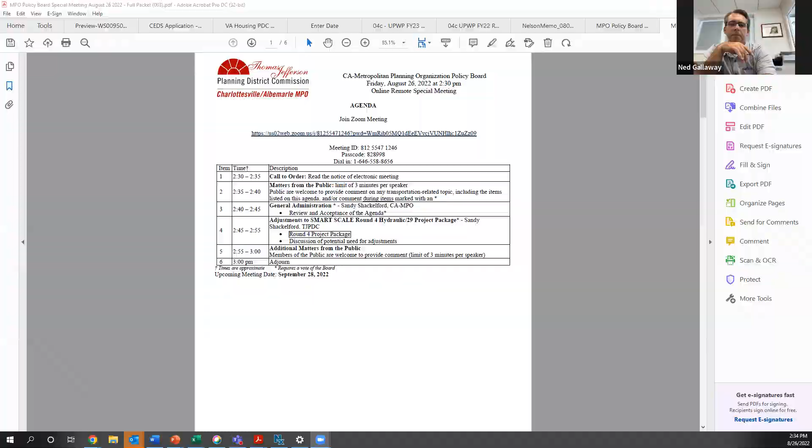So back to you, Mr. Chair. So we are here to, I don't have, my screen is limited. Do you have the agenda that you can put up? Yes. I mean, we're here for one item, I believe. We do. We would start with public comment. We do have a public comment period. Is there anyone here online that wishes to give public comment? I'm not seeing anybody raise a hand. Am I missing anybody? I'll just call again. Anyone here to give public comment? All right. No hands are raised. Yep, we'll close the public comment period.

And Sandy, are you introing the topic we're here for today? Yeah, I'm going to turn this over to Hal Jones, who is the project manager from VDOT. And he's going to give you some background about the Hydraulic 29 project package that was approved in round 4 for Smart Scale funding, and will describe basically what it is that VDOT is requesting at this time. Go ahead, Mr. Jones. Okay, good afternoon. Thank you, Sandy. Can everyone see my screen? I'm going to give a brief overview of the project. This is the location of the Hydraulic 29 project, on the north end of Charlottesville, as most, if not all of you are aware.

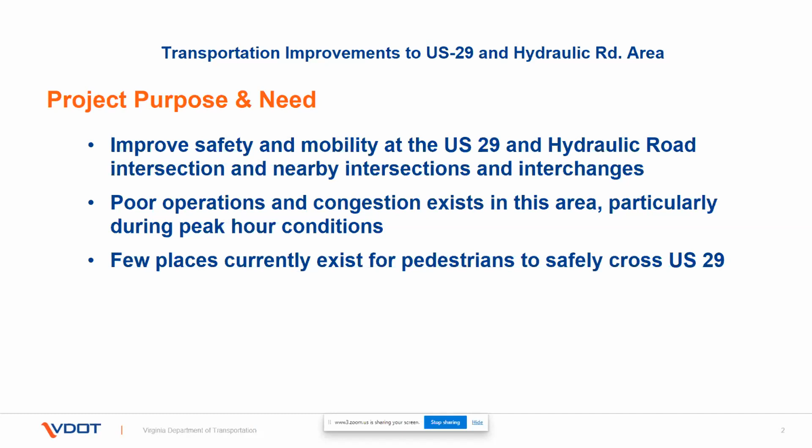The project purpose and need is to improve safety and mobility at the US 29 and Hydraulic Road intersection and nearby intersections. Currently, there are poor operations and congestion in the area, particularly during peak hour conditions. There are few places to currently cross US 29 safely in this area. So this is one of the reasons we're working on the project. The status of the project is, this is the last remnant of the 29 Solutions program. We currently are under procurement for a design-build contract on the project. Our estimate exceeds our budget, and next month at the September CTB meeting, we're planning to ask for additional funds.

Just a brief background, the Hydraulic Planning Advisory Panel, which was a group of about 12 individuals, city and county elected officials and business owners, met beginning March 2017 to start a planning study, which would be the basis for the transportation study for this project. The panel met twice a month for most months through July 19th of 2018. So there were 29 meetings over a period of about a year and a half, where the planning study was developed and reviewed and formed the basis for a group of transportation projects to address needs out to 2045 in the future.

This ended in an application for the 2018 Smart Scale round, which was very robust, and it included 3 grade-separated crossings of US 29. On the top of the screen is a Zan Road overpass. At Hydraulic and 29, we looked at a design where Hydraulic Road would go underneath 29, and down at Angus to the south, we looked at an overpass to carry traffic and pedestrians over 29 there. The application was scored, and it did not score well due to the cost estimate, and it was not funded.

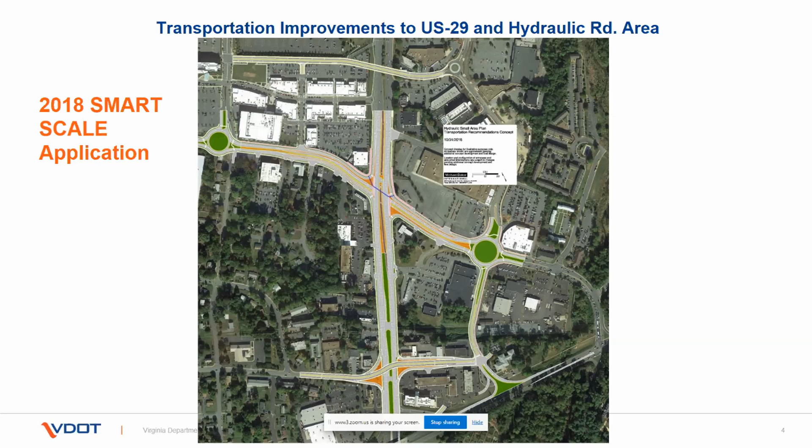So for the next round in 2020, much of the former panel met again in early 2020 to prepare an application for round 4 of Smart Scale. We started this with the basis of looking at available funds and trying to reduce scope to make some improvements and utilize the existing funds while needing very, very little additional money.

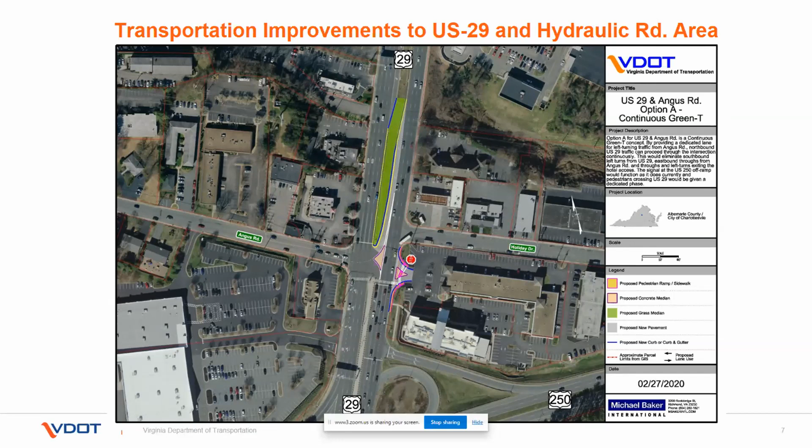Element B is the green T at Angus Road. Notice in particular the entrance and access for the hotels on the east side of 29 there. Through the last year of development, we made some changes to that that I'll show you. Element C is the pedestrian bridge with bus stops on either side. The bus stops are indicated in the green shading, rectangular areas.

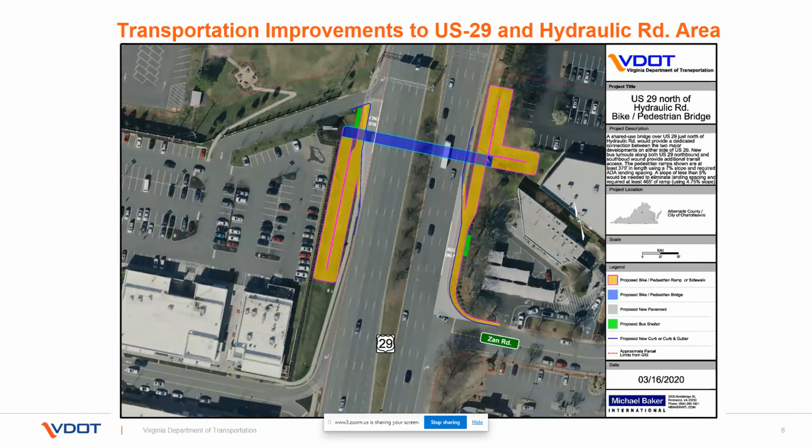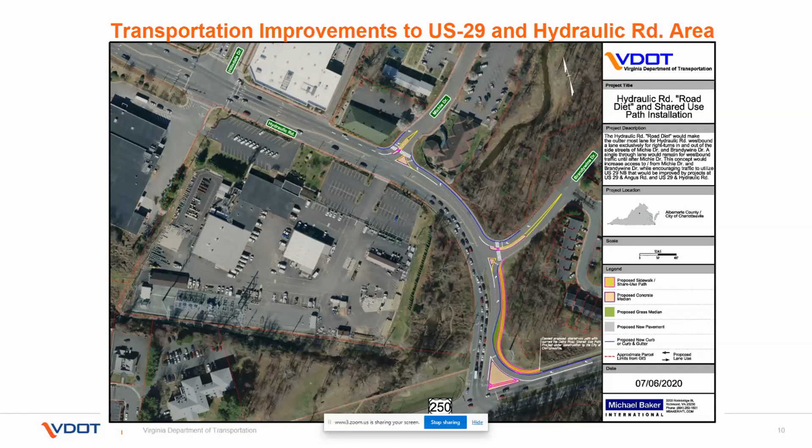Element D is the roundabout at Hillsdale and Hydraulic Road. And the last element E is the Hydraulic and Brandywine and Michie section. The orange designated shared use path is shown on the lower right, and we're installing medians to direct traffic for right out only movements from those streets. So here's the overview as it went to Smart Scale application in the summer of 2020.

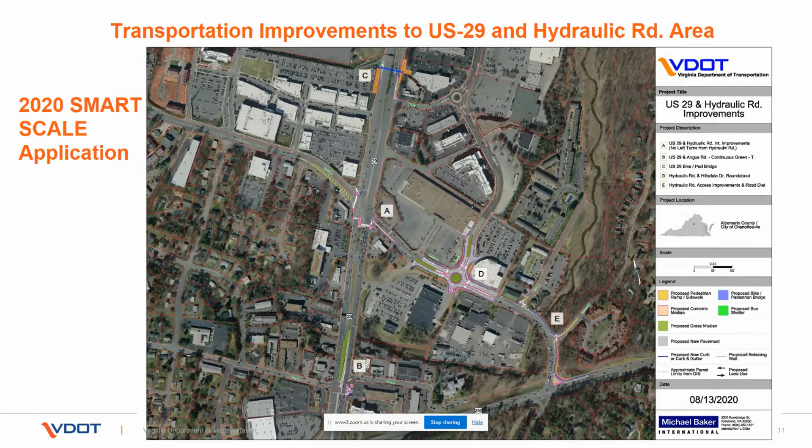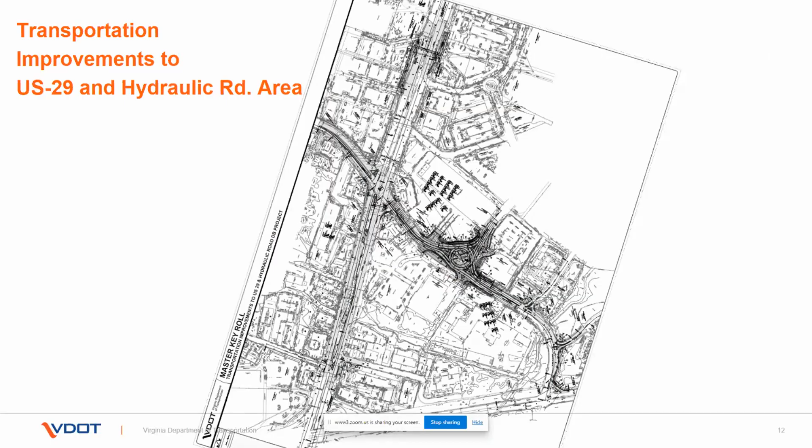After we got the project funded last July in 2021, we began additional studies, geotech studies, environmental studies, additional survey, and we got into more detailed preliminary design. And this is the current concept, as you see, which we took to public hearing this past May. I'll highlight each of these elements in a bit more detail, but we did have a public hearing in May where 63 attendees were present. We had 2 additional follow-up meetings with stakeholders, primarily business owners in the corridor here on Route 29.

This is the Hydraulic element, element A, and 29 runs diagonally north to south here on the page. We had to rotate these to better fit the paper, but this shows more detail and more design work for this particular element. Notice that on the west side of Hydraulic, we now are reconstructing a new median so that we can align the lanes going across 29 with Hydraulic. So that's a safer result where we're not looking at the lines not lining up going across 29.

You see the crosswalk to the south on the south leg of 29, and notice that's a little bit unusual in the median, and we've got a bifurcated roadway at 2 different elevations. So in order to meet ADA regulations, we had to stretch out the crosswalk in that fashion, but that will be signalized.

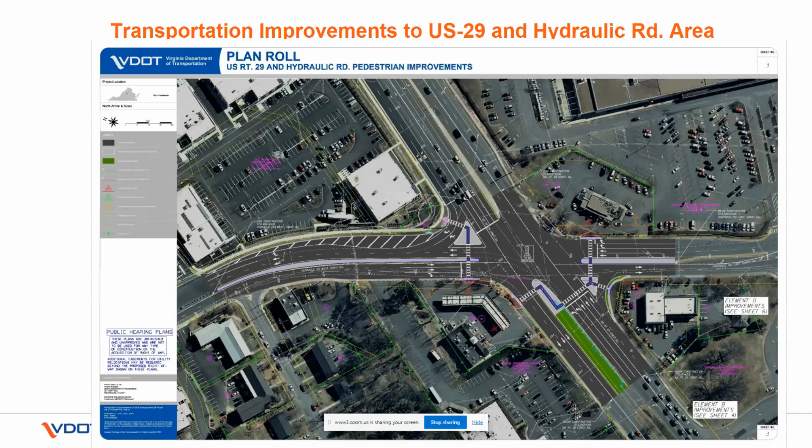The element B, green T, now I've rotated the page again on you. 29 runs left and right on the page with north to the right. Notice the access and entrance to the hotel here. During further development, we looked at removing the existing 29 entrance and relocating that off of Holiday Drive to promote a safer situation so that traffic leaving the hotels would not be inclined to try to take a left out of there and go south on 29.

Even though there's a concrete median, we've seen instances in a couple of other locations where traffic has actually gone in the improper direction. So we thought that would be a cleaner and safer orientation to relocate that entrance off of Holiday Drive. And I'll show the existing conditions for this area on the next page so you can get an idea of the median changes.

You can see there's a crossover just north of Holiday Drive, and then one further to the north for where the Holiday Inn is there on the top right of the photo. So back to the proposed plan, we're closing one of the crossovers and we're reconfiguring the crossover at Holiday Drive on the right side for an access in only.

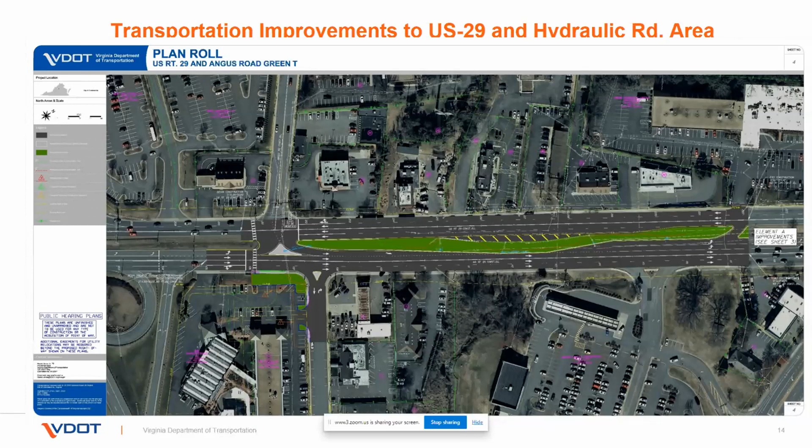Element D is the roundabout. Through further development, we looked at a couple of things, and it should be noted that two-lane roundabouts or hybrid two-lane roundabouts require quite a bit more thought and design than a single-lane roundabout. So that led to this design being put forth at the public hearing.

It does impact the old Kmart property quite a bit more, and it does change access to the Kroger on the bottom of the page. You can see Whole Foods there to the planned northeast quadrant. So we're looking at some changes to this to provide better access to Kroger, access to the roundabout itself, which would not preclude an extension of Hillsdale South in the future.

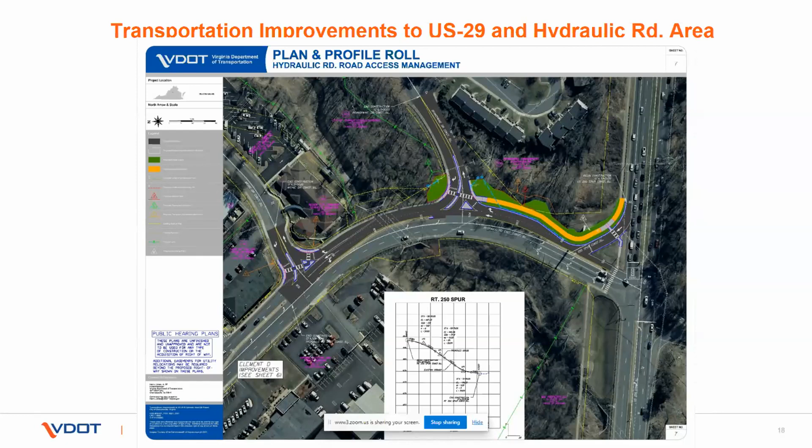All right, any comments or questions here? No. Supervisor Mallek has her hand raised, Mr. Chair. Oh, yep. Supervisor Mallek? Thank you. Sorry, I missed this on the drawing. So is it now a single lane roundabout at Hillsdale?

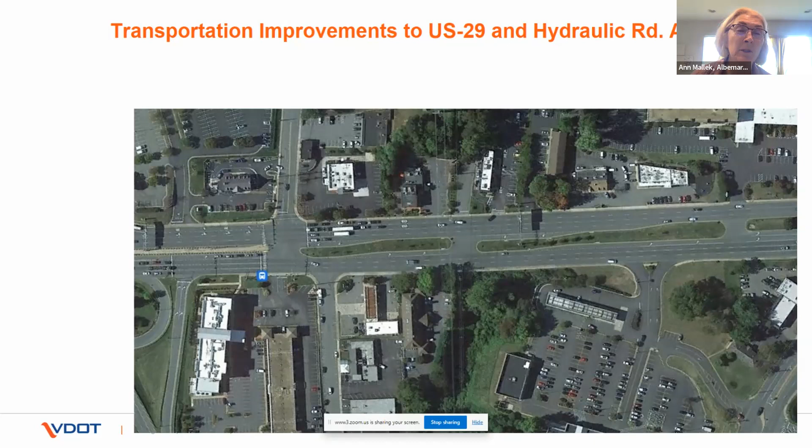No, ma'am. Oh, no, okay. It is still a dual lane, but it's a hybrid because there is a single lane on two pieces right there in the crossover, but the main through road there, Hydraulic, is dual lanes. Okay. VDOT's policy is currently not to design and build completely dual lane roundabouts with two circulating lanes until we can get a better handle on how those operate. So thank you. All right, any other questions?

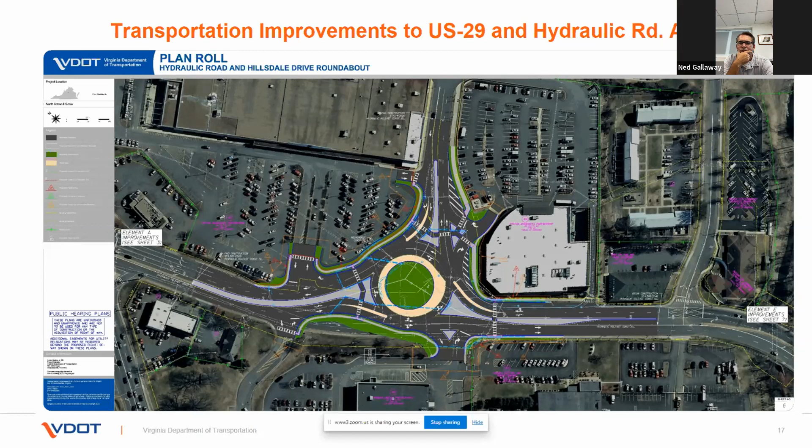All right, what's the next step here today? Mr. Nelson, would you like to explain what it is that you are asking for from the policy board at this point? Sure, Sandy. Can you all hear me okay? Had to use my cell phone. Yes, sir. So as they indicated, we're in active procurement right now, and we're looking at our budget, and we're trying to figure out a way, as we've updated our estimates going into this next phase, of how to complete as many facets of this project as possible. So we've gotten to a situation right now where we're over budget based on updated estimates and some of the things that we've looked at.

So the question has been posed to the MPO, would there be an appetite to remove one of the elements to ensure that we get the biggest benefit out of the other elements in the project? And the one element that we've been looking at and considering to remove is the green T, which Mr. Jones indicated and showed in the graphics, which also restricts a lot of access to those business owners down there, which I do believe we had quite a bit of input during the public hearing process, and we had individual stakeholder meetings regarding some of those needs.

So the ask is, is the MPO board amenable to recommending the removal of the green T part of the project, not to preclude it from happening in the future, but it would just not be built as part of this design build suite. And moving forward, we would try to come up with different alternatives to address that situation, particularly there at that intersection. Thank you, Mr. Nelson. Would the policy board members like to comment?